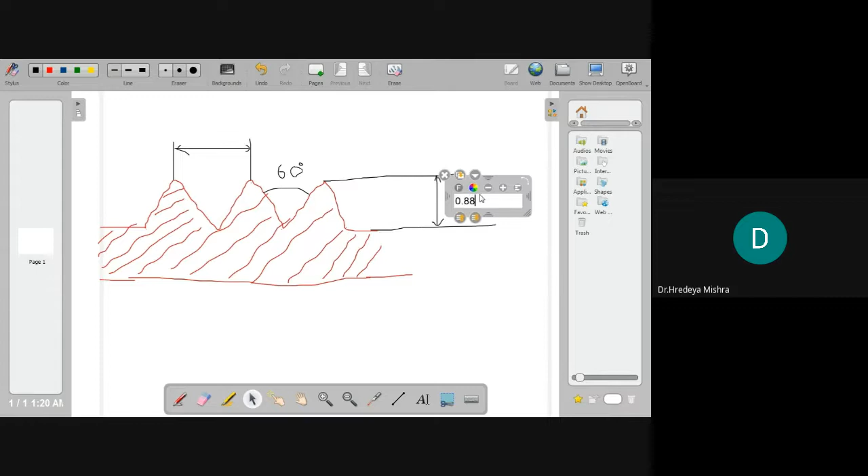Here, this and this distance. Okay, now I have to write here. This is 0.866 P. Okay, and here this is P.

Okay, so this distance is P and this distance is 0.866 P. So what is the P? P is the pitch of the thread. So this is the vertex to vertex distance, one vertex to another vertex, or crest to crest distance.

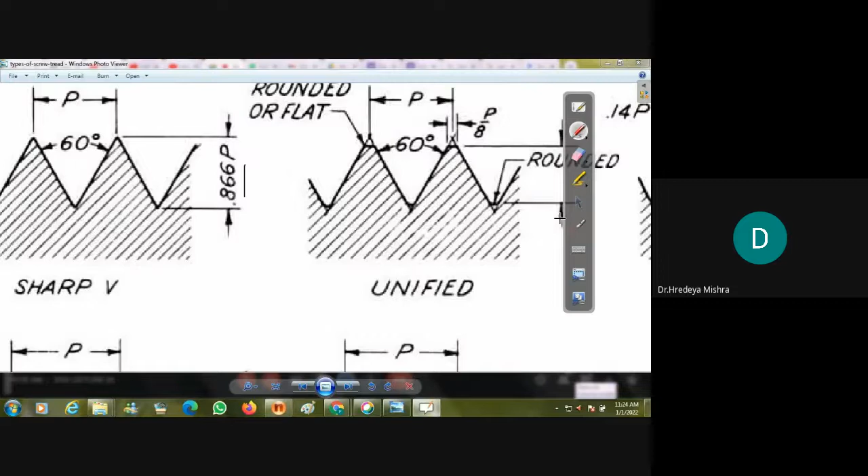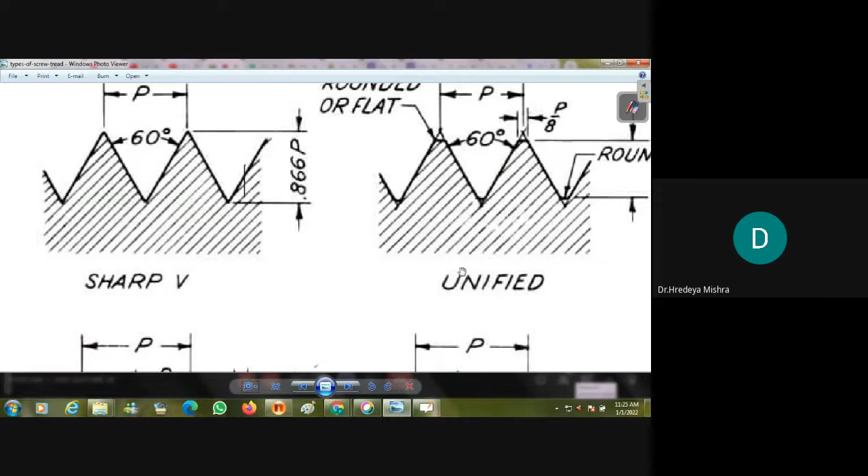Okay, so I show you here. Just take a new page, and here - where are my apps? Okay, this is the application. So I will draw the first form, that is the sharp V, with the help of scales. Where is the scale? I take this ruler.

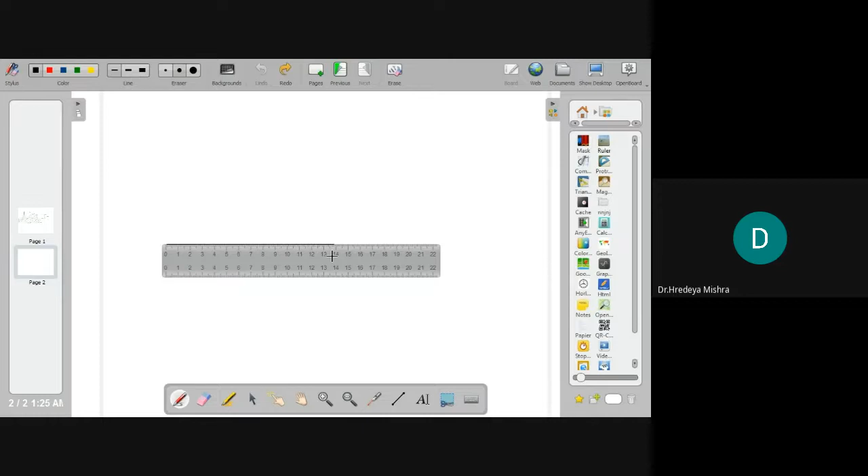Okay, so I draw a highlight - no, just draw a black line. Okay, I just take this line.

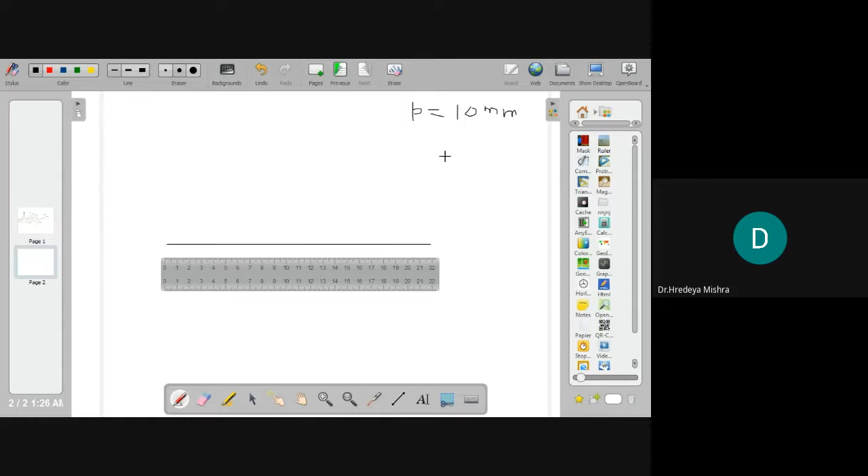Okay, so here I want to take P equal to 10, P equal to 10 millimeter. Okay, so that is very small - 10 millimeter means that is 1 centimeter. So I just take it as 50. 10 is very small, so I take it 50.

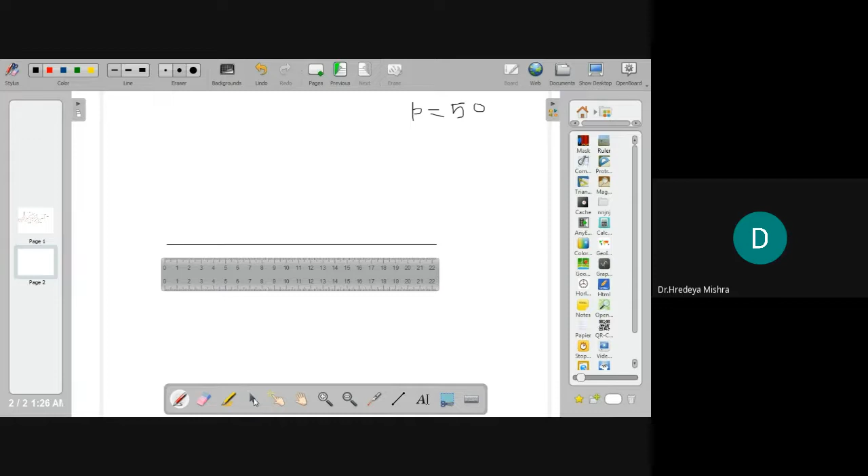1 point here, this is 5, at 10, then 15, and then 20. So these are the 5 points we took - 5, 10, 15, and 20. 4 points are there, then what is the height?

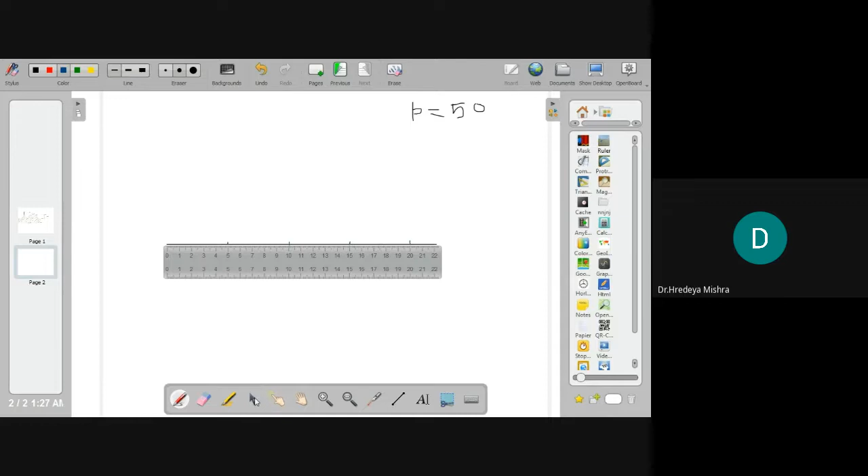This height is 0.866. Okay, so if it's 0.866, then what is the value of this height? I just rotate this. Okay, this is around 90 degrees, so there is no problem.

So if the calculation here - so just you have to calculate what is the value here. Okay, 50 into 0.866, so that is 43.3, so I take it as 43 millimeter.

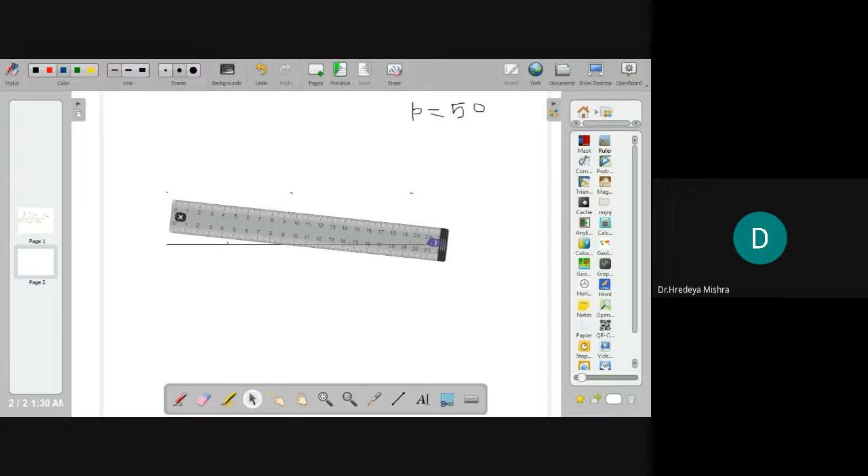Now I'm going to rotate this to draw a parallel line. I take the next color and draw the line.

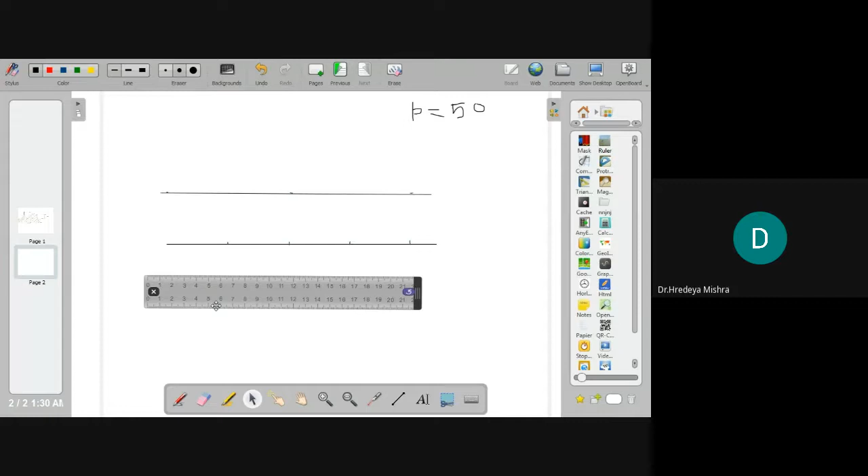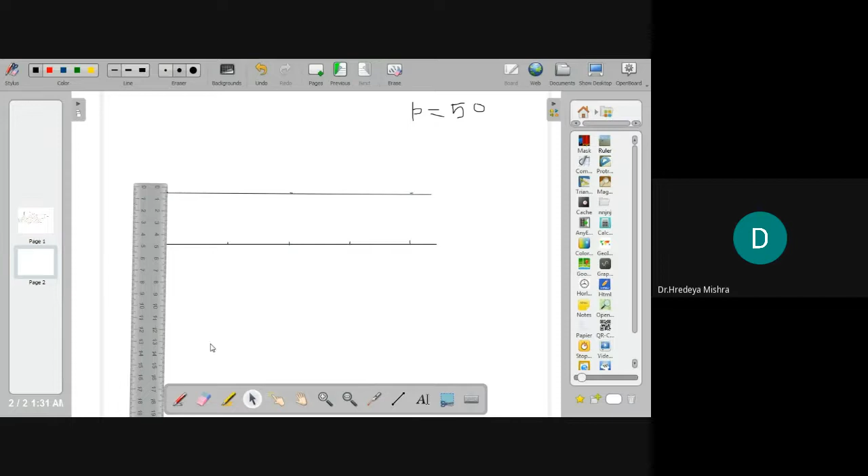ठीक है स्टूडेंट्स, तो ये क्या हो गया, आपका पैरेलल लाइन हो गया, वेयर वी गोइंग टू टेक द अनदर पॉइंट्स. ओके, सो अभी हमने पिच कितना डिसाइड किया है, 50 mm. सो यहाँ पे जो डिस्टेंस होगी, we just take like this. Okay, perfect.

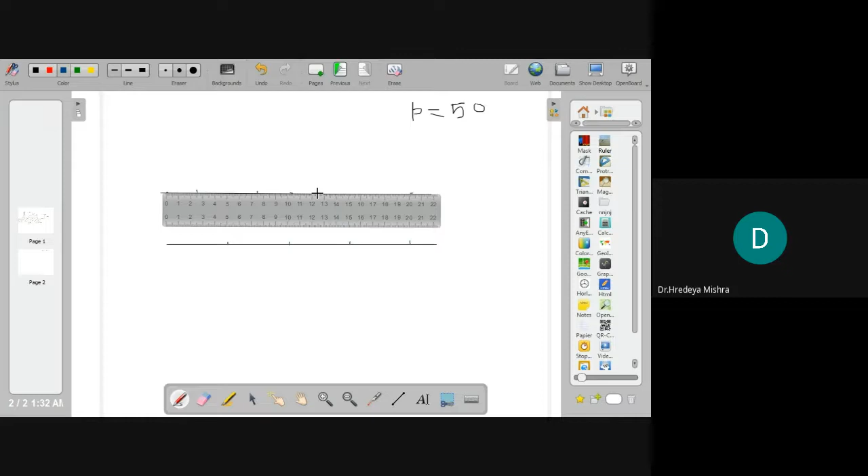ये पॉइंट है, तो जो हमारा फर्स्ट पॉइंट होगा, our first point should be at 2.5. कितना यहाँ पे मार्क किया, 2.5. देन अभी 2.5 में 5 ऐड करेंगे, दैट इज द 7.5. देन add 5, how much, that is the 12.5. Okay, 12.5, then add 5, 17.5. Okay, then 22.5, that there is no problem.

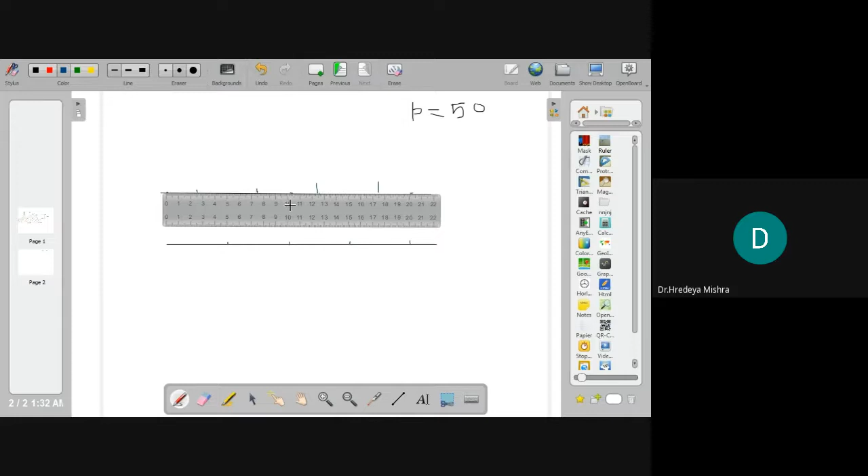So marking is completed. Now we have to make this. So just take a red color and we have to make the point here. Like this.

Now our, this is our form of thread, that is the sharp V type. Sharp V type is completed. Just we provide the hatches here.

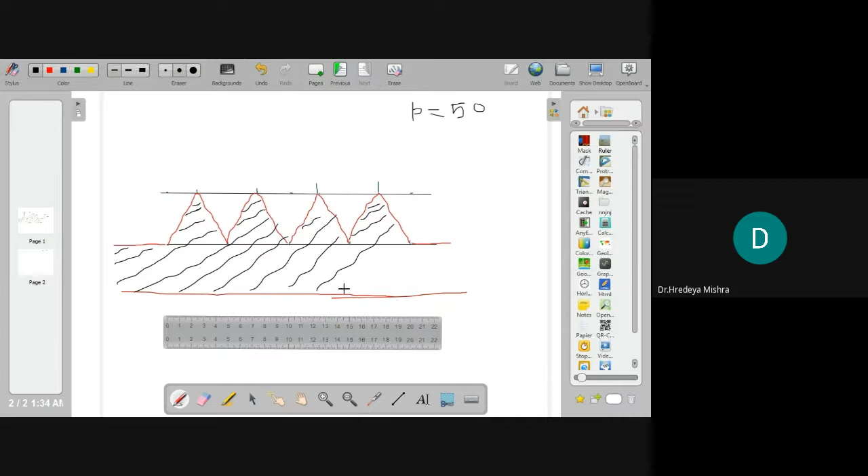And whatever the notation is there, we just have to mention here, कि आपका जो भी नोटेशन है, ये आप अपने पेंसिल से प्रॉपर वे में कर पाएंगे. इतना ज्यादा मेरे लाइन में वेवीनेस इसलिए आ रहा है बिकॉज आई एम ड्रॉइंग इट फ्रॉम माई माउस.

ओके, आप स्केल की भी हेल्प ले सकते हैं, जैसे मैं स्केल की हेल्प लेकर के दिखाता हूँ आपको हाउ यू ड्रॉ. जस्ट आप ऐसे इंक्लाइन करिए और 1 बाय 1 लाइन ड्रॉ करते जाइए, तो आपको एक प्रॉपर स्केल में आ जाएगा. ठीक है, यहाँ पे इसलिए मैंने नहीं किया क्योंकि इट टेक सो मच टाइम.

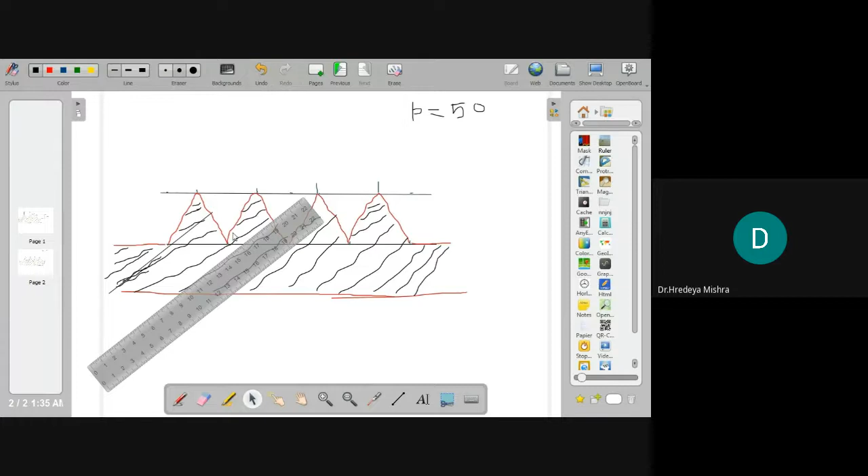ये देखिए, अभी परफेक्ट लाइन, because this software takes much more time for this. That's why I'm not using this method. So this is also your freehand sketch, so you can use your pencil and your hand and avoid the use of the eraser too. But this is your first time you study this, so you can use your eraser too.

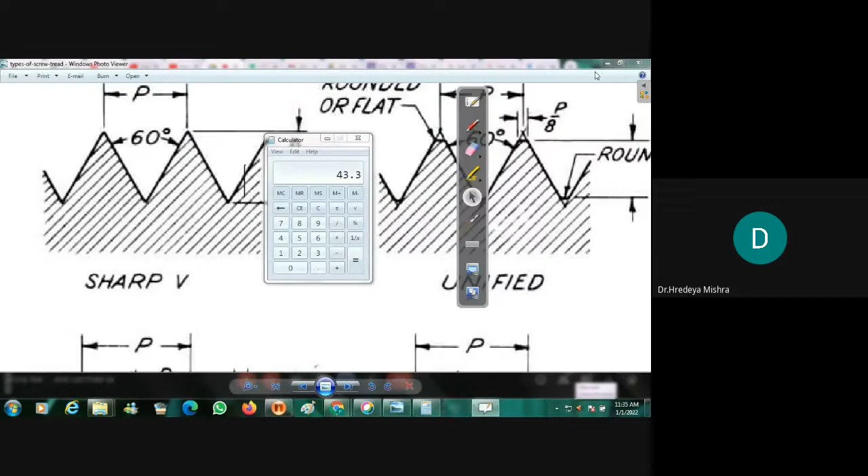Okay, so the next thing we have to put down is this dimension P, and this dimension is 0.866 P. Okay, so just you have to give the dimension.

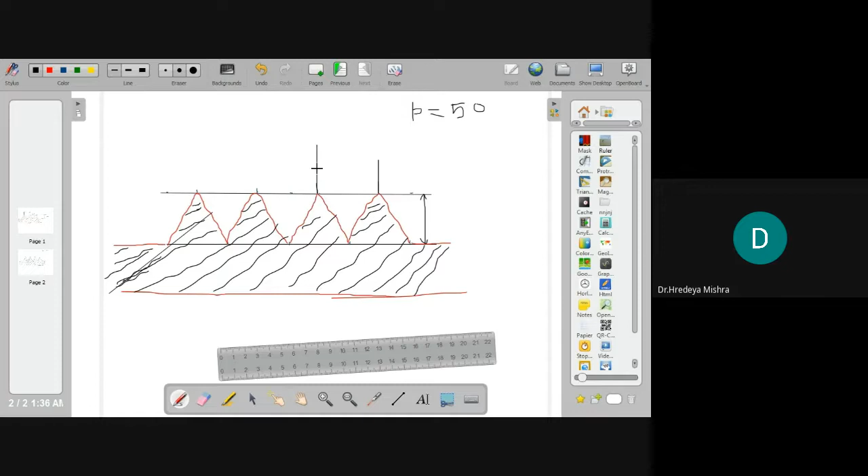ठीक है, किसी भी थ्रेड के बीच में आप डायमेंशन शो कर सकते हैं. मैं इस थ्रेड पे कर रहा हूँ. इट डजंट मीन यू चूज द सेम थ्रेड फॉर द डायमेंशन. देखिए यहाँ पे आप 60 शो कर सकते हैं, यहाँ पे आपने 30 शो किया, यहाँ पे मैं 60 शो कर दे रहा हूँ. 60 इज डिनोटेड एट दी 60 डिग्री inclination between these two threads, that is the 60 degree for sharp V thread.

Okay, so this thread is very less applicable because there has sharp edges. So in the manufacturing process we avoid these sharp edges. Okay, because the stress concentration is there, so they can create more friction and tear and wear between two meshing parts.

जब भी आपका मेशिंग होता है, बिकॉज क्या होता है, जब हम थ्रेड की बात करते हैं, देन दिस इज द मीनिंग वी गोइंग टू assemble two parts, male and female part. Okay, one has external thread and one has internal thread. So when we talk about this, then the meaning is that two parts are meeting to each other and we have to minimize the friction between them for smooth working.

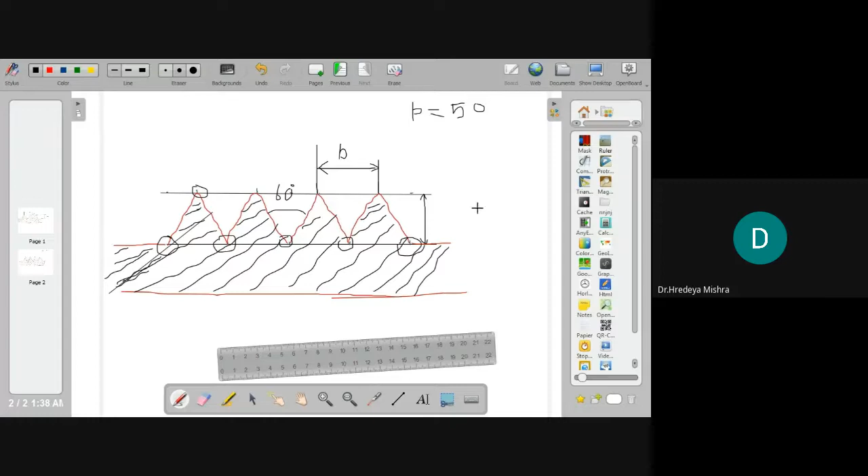ठीक है, स्मूथ वर्किंग के लिए जो भी हमारा प्रॉपर sharp edges होता है उसको we have to avoid. So how to avoid, this is the example of this second thread. देखिए क्या है, we have to provide the small round or flatness to avoid this stress concentration and tear and wear between two V edges or V shape edge.

Now this is a more modified thread, that we call the Whitworth thread. Okay, the modification is there. This is more round and the angle between two sides is 55 degrees, and the height is also reduced. See, because there is corner to corner here, vertex and peak is 0.866 P, but here 0.64 P.

Whatever the value of P, that means यहाँ पे हमने 50 लिया था, then this becomes 43.3, and here we take 50, then what is this value? See, I take 50 just 50 into 0.64, that becomes 32. तो यहाँ पे कितना हुआ था, ये वैल्यू हाइट कितना था 43, जबकि यहाँ पे हाइट कितना हो जाएगा 32 विथ कंपेरिजन टू द thread. Okay, with comparison to the pitch, this is the value of pitch.

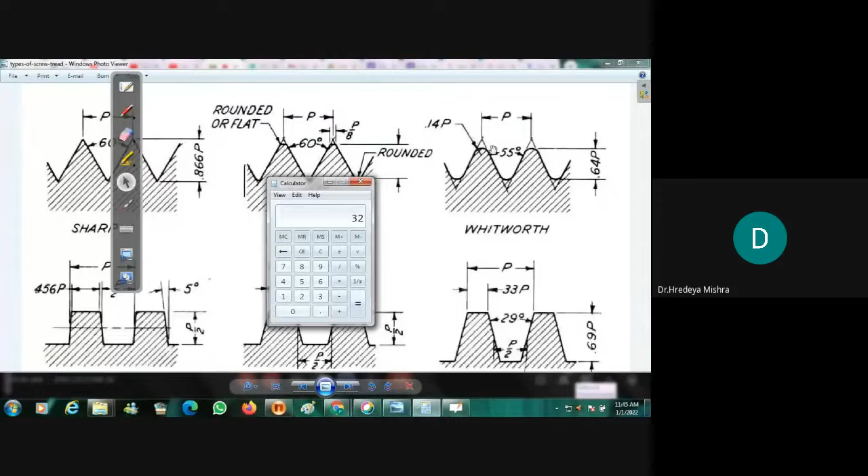Okay, then next is our Acme thread. Acme is a modified type of square thread. So this is our square thread, and Acme is the modification of this square thread. So what is the modification? We just modify this angle.

This is 5 degree, see, this is 5 degree. So we just increase this, and between these two, we give 29 degrees for avoiding the stress concentration, for avoiding the stress concentration.

See, B and S worm. So this thread is mostly used in bolts where the motion depends on rod type, they say worm and gear wheel - that we have to use.

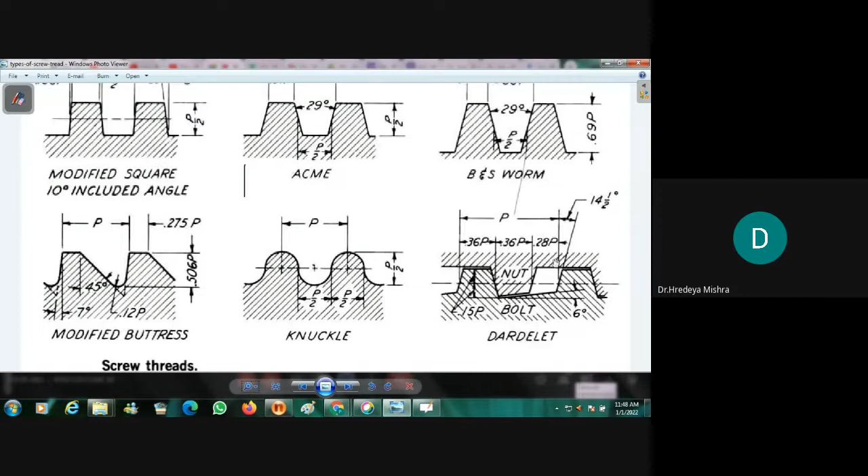Okay, so knuckle thread is for the meshing purpose, and this is our Dardelet - this is also used for meshing. We can use knuckle and Dardelet type of thread in gear machines, meaning when we talk about gear machines, gear power transmission, gear train, then we can use this type of thread.